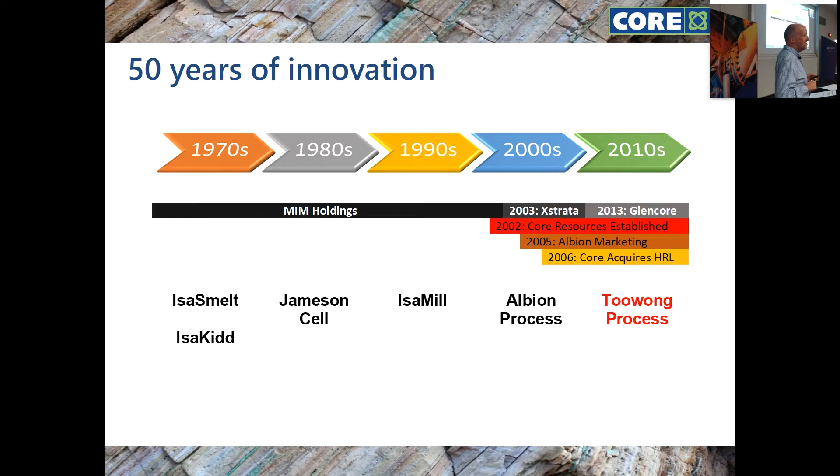We've had a strong partnership on Albion, and we're currently working on Toowong, and we've learned a lot from both those exercises, which is a part of what I'll talk about today. Just in terms of Core as a business, we try and survive in the environment of doing a lot of technology and innovation stuff, but also we have to pay the bills every day.

So we have to run a commercial business, and one of the ways we can do innovation is by having a services business that actually makes a return. So we run services activities. We run met test work, process design, project management activities for mining companies for which we get paid. And we do a lot of that, and it keeps us very closely connected to industry.

So our day-to-day activity is doing everything from small scale, bench scale, met test work, process design projects, up to pilot plants, up to helping people implement and commission metallurgical projects.

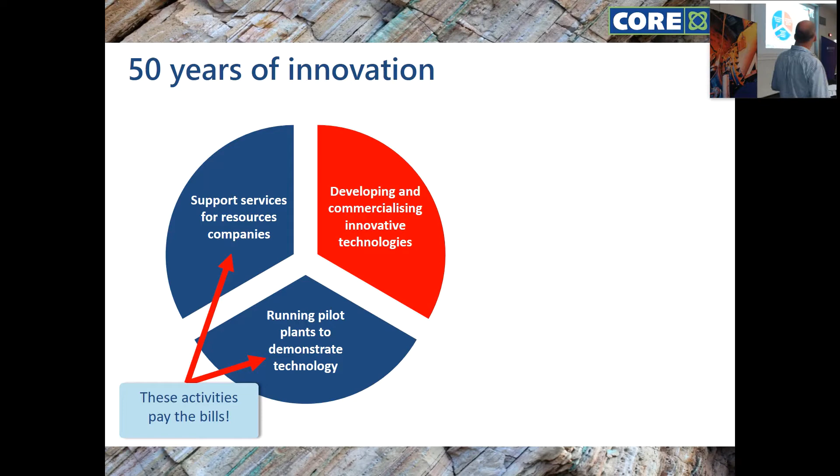And then, hopefully having a sound base from doing that, we've done a lot of fairly blue sky, big scale technology development work. And that's where we've learned a lot, how you do these big ambitious things and still pay the bills every day. So the two that are really current for us is the Albion process.

Probably in the room, a few of you will have heard about it and heard people talk about it. It's essentially a commercial process now, so it's gone from being an idea that took a long time to mature, but it's out in the market, being very effective in industry. It's pretty mature technology now, and that's to deal with refractory gold processing.

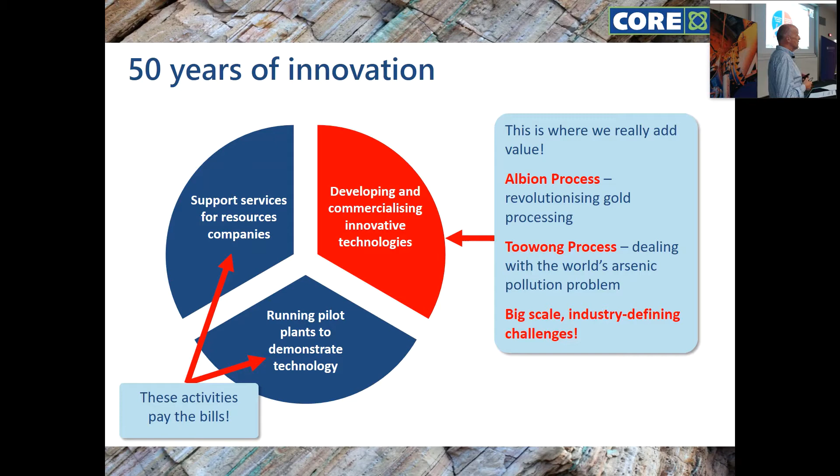And then the Toowong process we'll talk about a bit more, is dealing with another big scale global mining problem, and that is uncontrolled arsenic circulating around the world in copper concentrates. Just talk a bit about the Albion process. It came about a long history, and a long history driven by necessity.

So the Albion process technology really is inextricably linked with the development of the IsaMills. And IsaMills came about because of McArthur River mine mainly. MIM for 50 years owned the McArthur River lead zinc mine in the Northern Territory. It had very difficult metallurgy because a low grade of metamorphism meant that it hadn't developed large mineral grain sizes. It was very fine grain, very hard to separate and make pure concentrates.

MIM battled with it from the 60s through to the 90s, and the breakthrough with McArthur River was developing effective technology for very fine grain mineral separation. That was the IsaMills. And to me, it's one of the great stories of adapting technology, where IsaMills were originally developed by a company called Netzsch in Germany for small scale ultrafine grinding of pigments and things like that, and identified as being something that could be scaled up.

And they were scaled up from 20-litre vessels to now we have 10 cubic metre vessels with 3 megawatts of power in them. And that enabled the McArthur River project to go ahead. And then as that process went on, it was recognised that ultrafine grinding and oxidation of ultrafine mineral particles was a way of dealing with refractory gold. Refractory gold is where your gold is bound up in sulfide minerals and the cyanide doesn't get at the gold.

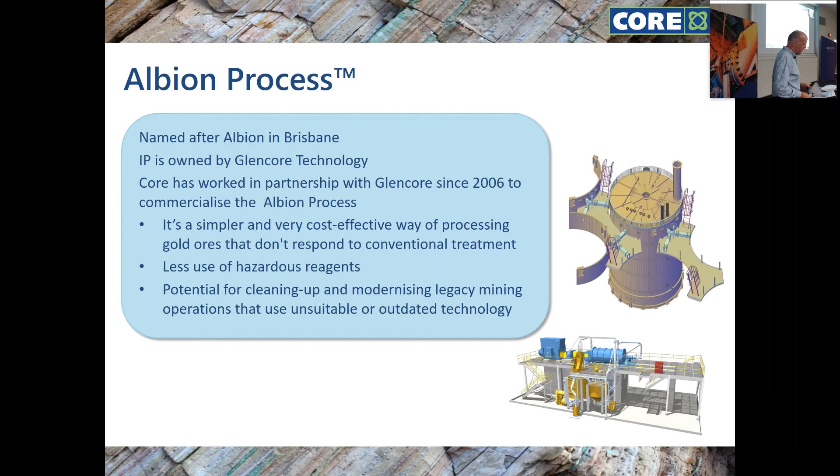And it all sprung out of this necessity of dealing with McArthur River ores, translating a technology to a different use altogether, to use in mineral scale ultrafine grinding, and translating it again into dealing with refractory gold. So Albion is now out in the market and working very well.

Strategically in all of this, our laboratory in Albion has been very important. This laboratory has been around since 1982 when it was established by MIM as part of the whole research process into McArthur River and similar problems, which we now operate as a commercial laboratory. There aren't many of these in the world that have the facilities and the capability, and it's a key asset in selling the technology to industry, that we've got all this technical support available.

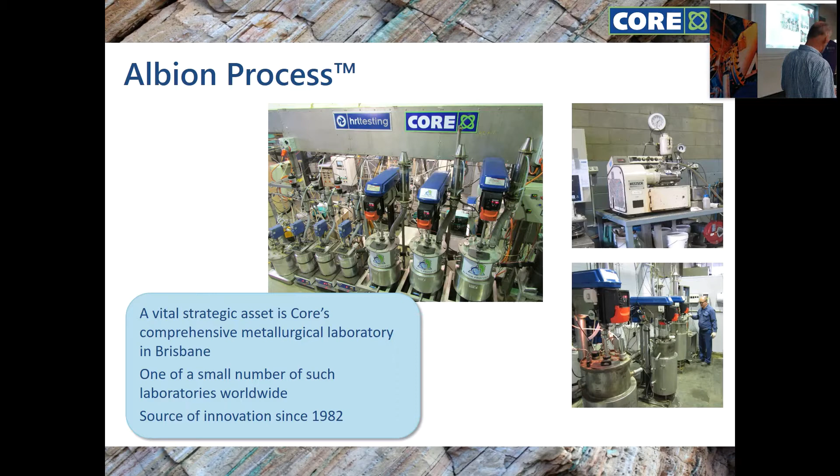Let's just look at a little example of Albion, and again, this is where you really learn, is take it out into the commercial world. Our absolute reference project right now is the GPM Gold project in Armenia. This was a long-standing mine that had run in the Soviet era on an ore body that became increasingly refractory with depth, not an uncommon problem.

At the time they came to us, they were operating with recoveries of 20 to 25%, and it came into new hands, and actually they identified the Albion process as a potential solution. So we started working on this in 2012, and for lots of reasons it worked very well, and we'll come back to the reasons later on, but from a technical point of view, it did what was intended. Gold recoveries got up to well over 90%, more like 95% or more, and very stable. The project started quickly and has been very stable since then. It was important.

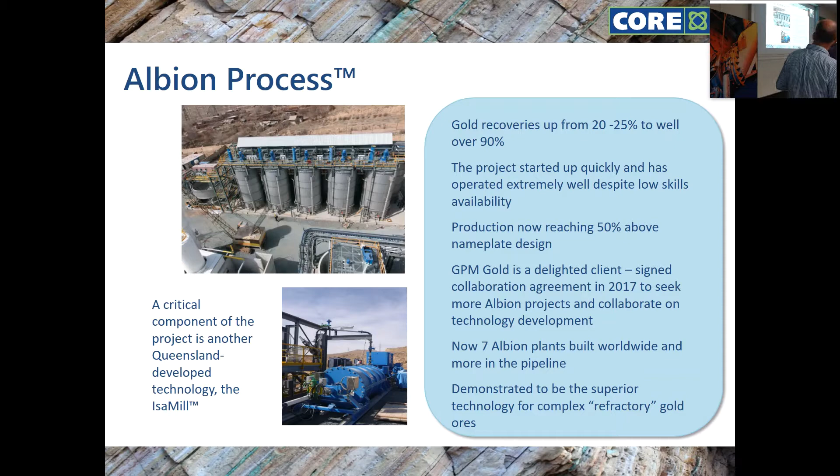Currently there are 7 Albion plants worldwide, and there's more in the pipeline. And I think it's out there demonstrating that it's a superior technology for many refractory gold ores. The importance of GPM Gold can't be underestimated. Having a great reference site, and actually the fact that it was in a frontier area with an unskilled workforce, and that it's been stable and easy to operate, are really important. As I said earlier, the IsaMill is a critical part of this, for the ultrafine grinding part of the process.

So just some of the things that helped Albion get going. So the attributes, this is the things we sell, are that it demonstrates very high recoveries of gold. It actually is in current operation, so you've got it working in a real life environment. For a client buying it, it has process guarantees, and so remember that bit. That's very important, that someone big like Glencore is prepared to put their money behind the performance of the process. It has lower capital costs.

I think very importantly, it's got relatively low operator skill requirements, so you don't need hundreds of highly skilled operators, and we work in a skills depleted world. The whole feasibility study, ramp up and commissioning process is quick and painless, and we can help them all the way. So I think a pathway to commercialization for a client is very important, and it's kind of bulletproof, so it can deal with a wide variety of feed grades and so on. So it's not a sensitive instrument in use.

So I think some of the things that helped us there were, I'm recapping a bit, but we had strong third parties reviewing it, independent parties, and giving good information to the market on the operating costs and the capital costs and the performance. A great reference site, for any technology, having a real world reference site is important.

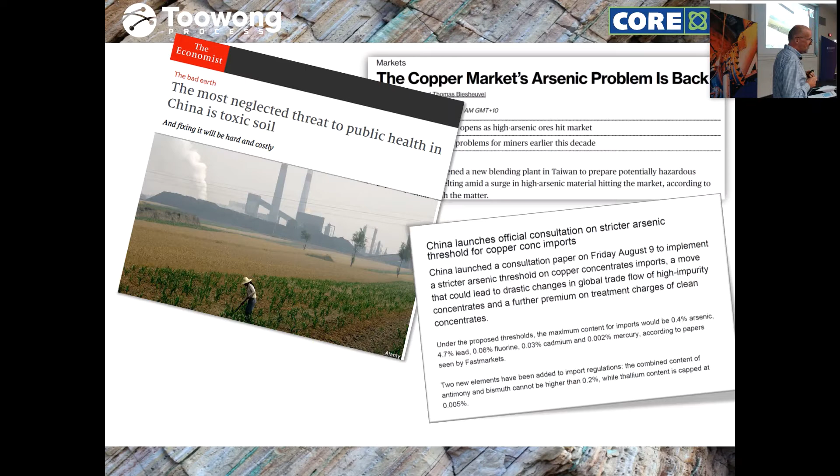I'll just move on to another. This is the second of our technology challenges right now, and this is the Toowong process. And the issue we're dealing with here is that quite notably over the last 10 to 15 years globally, the arsenic content, particularly of copper sulfide concentrates, has gone up. And there's a few reasons driving that. We are dealing with more complex ore bodies, getting deeper into porphyries. We're probably developing ore bodies that, because of arsenic, were less likely to be tackled 10 or 15 years ago.

Some of the reference clean sulfide concentrates are getting dirtier. So we have quite a rapid build-up in arsenic appearing in copper concentrates around the world. And this is a bad problem. So probably the industry route right now for dealing with arsenic in copper cons is to blend dirty cons with clean cons, and then you just spread the problem wider. So the same amount of arsenic ends up in the smelter.

And when arsenic appears in a smelter in copper concentrate, it gets volatilized, it goes up the stack, it may end up in the baghouse dusts where it's an unstable poisonous compound, or it may just simply become fugitive and end up around the countryside. And certainly in China, there's been a lot of uncontrolled metallurgical activities causing massive scale soil pollution and water pollution.

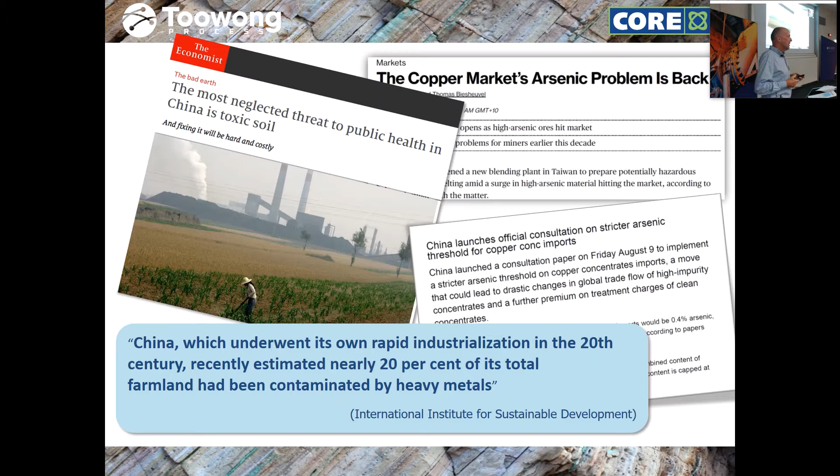In response, most countries that import concentrates now have got much stricter limits on how much arsenic can be imported. So you've got more arising, less willingness to take it. The only answer really on big scale right now is let's do lots of blending, and so we need an answer for this. And we're working on Toowong as an answer.

I think one of the interesting things now is there's probably 10 or 15 sort of tier 1 copper projects around the world that are not being developed because of arsenic. And there's 1 or 2 that are being developed with arsenic and having terrible problems. So I think it really is a problem that's here now.

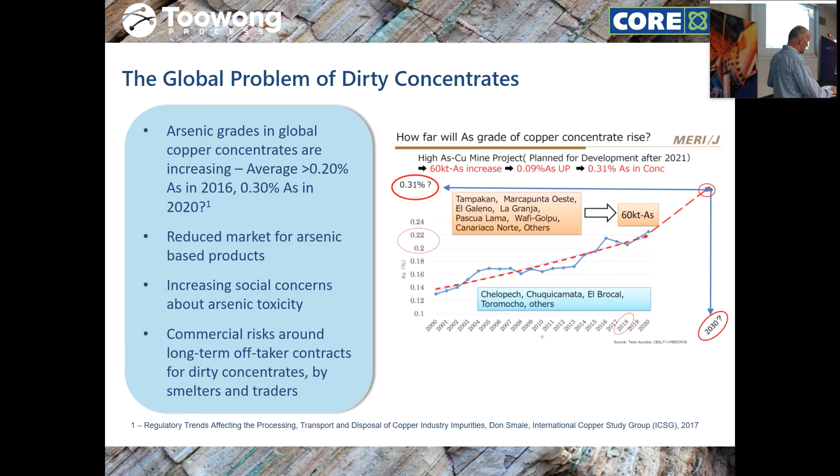So what is the Toowong process? The provenance of this was again a problem, and that was that MIM, later Xstrata, owned the Tampakan big copper gold porphyry in the Philippines that has very high arsenic, and they came looking for a solution, and Core and Xstrata at the time then developed the Toowong process to deal with particularly Tampakan's situation.

And what does it do? It actually uses quite well-known chemistry. So the heart of the chemical process is not particularly novel here, and that's using an alkaline sulfide leach to leach out the arsenic from the final copper concentrate. So you have your normal concentrator producing a copper sulfide concentrate, and then the alkaline sulfide leach can very selectively leach out arsenic and antimony, and it leaves the concentrate in a very clean form that can be sent to smelters, and it behaves well in the smelter.

The clever thing about the technology was mainly getting the chemistry such that we could recycle the sodium hydroxide, which is the reagent. And that's probably the important bit of innovation, recycling the reagents. It's not a once-through reagent, which would have killed the costs. We initially worked with Xstrata on that, because they had a problem with the Tampakan project. Actually, as time went by, they sold the project, and the IP reverted back to Core.

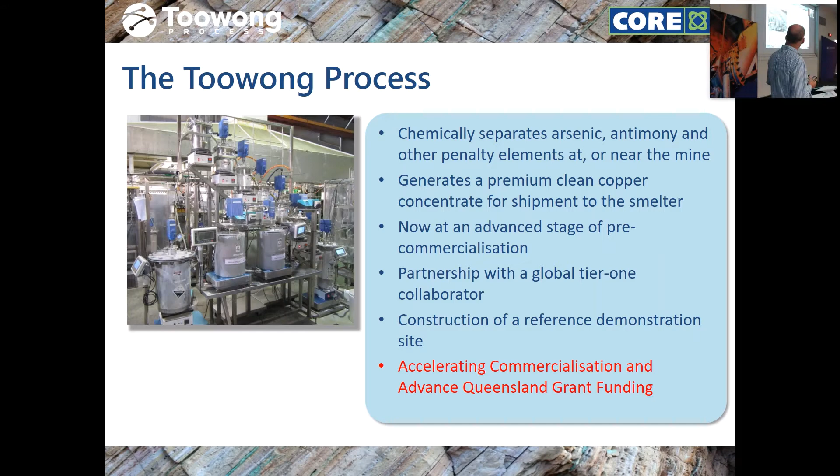Just maybe then thinking about, you've got a bit of innovation, and here's my kind of checklist of how do we get this through to be a commercial technology. And this is where I think you're starting to deal with factors that are not necessarily dealt with in a research project. But you've really got to keep your eye on all of these things. And there's a couple of good ways of measuring how well you're moving towards something which is commercial.

Now one of them is the TRL system. You might be familiar with this, technology readiness level. It's a way of measuring how mature a technology is to the point where it can actually be deployed commercially. It was originally developed by NASA in 1974. And it's quite powerful, and at the lowest level, TRL1 is just a hypothetical solution to a problem. We haven't tested it. It's purely a technical proposition, and there's no substantiating evidence.

And then it goes in logical steps through to the point where at TRL9, it's what you call a bankable grade asset. It's mature, it's got known standards and performance expectations. Market and technology risks are not driving investment decisions. Proponent capability, pricing, and other market forces are then driving uptake. So what does that mean? TRL9, you've got a fully mature technology.

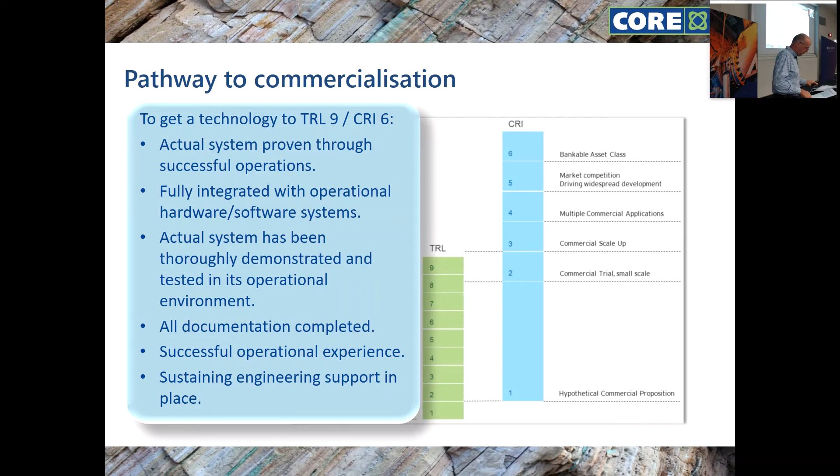So number one, you've actually got to meet all the criteria of TRL 9, which means it's no longer a hypothetical proposition. It's not just being demonstrated in an artificial environment. It's out there in commercial use. So that's where you need to get to.

You've actually got to fulfill a need to which a value can be attached, and it's going to be a credible value. So if the client cannot translate it into value, it won't get used. Quite often we come up with elegant technical solutions, but a client, a mining company particularly, at the end of the day, if it cannot put a value on it, it'll be hard to get it through a decision-making process. It might still be a great idea, but you've got to think of ways of demonstrating the value.

Demonstrating current operations and willingness to be a reference site. That's really important. There's nothing like, even if it's a demonstration scale, if it's in a real life environment, very powerful. And it's also very important that the site is willing to be a reference site, willing to have visitors and share information. So as soon as you start talking about site deployments, you've got to have that conversation about, are you willing to talk about this?

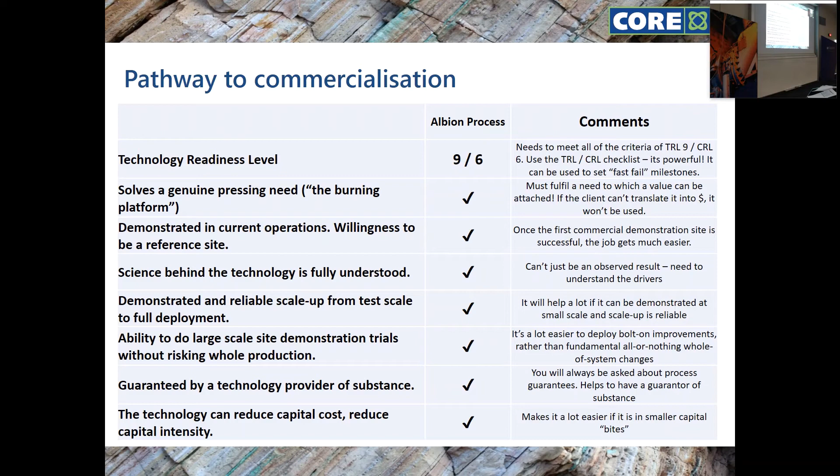I think innovations based around well-known unit processes or equipment are helpful, and to some extent, that's Albion and grade engineering. It's all relatively well understood individual processes just being run in a particular way, so there's low risk in individual unit processes. Toowong's a bit trickier for us because it's getting into quite unique circuits and some chemistry.

Delivering the technology to the site. So there is going to be a point where you have to think about in the commercial world how we're actually going to do tech transfer. So from, let's say, Albion side, we've got a pretty seamless process of doing lab scale testing, initial process designs, then sort of simple financial analysis, getting up to full DFS, all the engineering, procurement, delivery, and commissioning.

Every part of that's been thought of, and you've really got to be able to hand feed every part of that nowadays. We've done a lot of efforts with both Toowong and with Albion to partner up with engineering companies who can deliver all of the detailed engineering and site delivery.

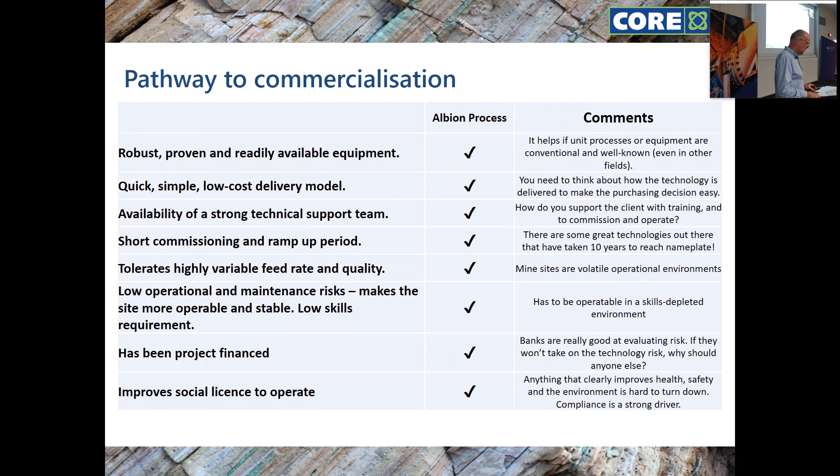We've had experiences of getting recruited in to help them do the innovation thing. So don't expect them, if you bowl up with a great idea, to just pick up the ball and run with it, because they've often just got so many other priorities and so little bandwidth. But they do all have innovation as a core strategy, and we've got to play a role in helping them there. We're looking at things like certainty of research funding from industry. That might have happened 10 years ago, 20 years ago. It doesn't happen now.

What's in the pipeline for Core? So we're still collaborating with Glencore on rolling out Albion, so we see that being quite a mature product in the market. We've got great gold prices at the moment, which is hopefully encouraging people to look at some of the more complex ore bodies around the place. It's now a very commercial solution. We're at quite an advanced stage with Toulon. We have a major collaborator, and we have some Queensland government grant funding.

So we're doing some quite detailed pilot plant testing to demonstrate parts of the process, and it's going to lead to an engineering design for a large-scale demonstration plant, a 100,000 ton a year plant. We're thinking about where feed's coming from for that plant. We'll probably continue in collaboration there. Now we're at a point where we've got an industry collaborator. We may bring in other collaborators from industry, and it's getting very near big scale commercial deployment.

We just formed a relationship with a South African company called IPEX. IPEX has got some very unique capability in using ion exchange for purifying low tenor liquors. So that means you're plucking out elements from liquors at very low tenors, unlike a normal SX-EW circuit. So it could be used for cleaning up effluent waters from mines. But one of the interesting low tenor liquors that you can deal with is from vanadium leaching.